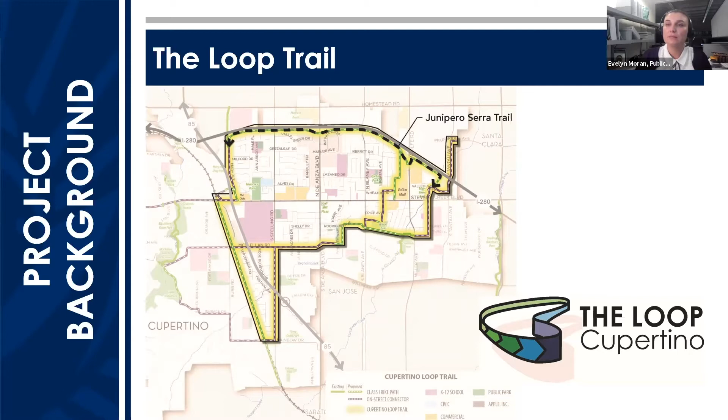In 2017, the city's capital budget authorized the funding of the Junipero Serra Trail feasibility study. The city hired Callander to complete this work. The study included a review of existing conditions along the trail alignment, research and documentation of the trail design criteria, the development and evaluation of various trail alternatives, and public outreach. In February of 2019, the feasibility study was reviewed and endorsed by City Council, and in May 2019, Council adopted the final feasibility study.

During feasibility, the trail was divided into 3 segments. Segment 1 is defined as the segment between the Don Burnett Bridge and De Anza Blvd. Segment 2, now the central segment, is between De Anza Blvd and Wolfe Road. Segment 3, now the east segment, is between Wolfe Road and Vallco Parkway.

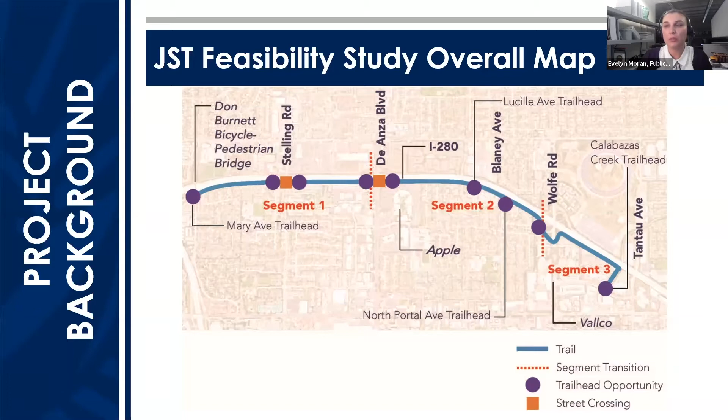Alternative 1 of the feasibility study: the trail alignment cost matrix in the feasibility study allowed decision makers to see various estimates for each alternative. The city selected alternative 1 because it was financially rational, and in December of 2018, the Bicycle Pedestrian Committee endorsed this alternative.

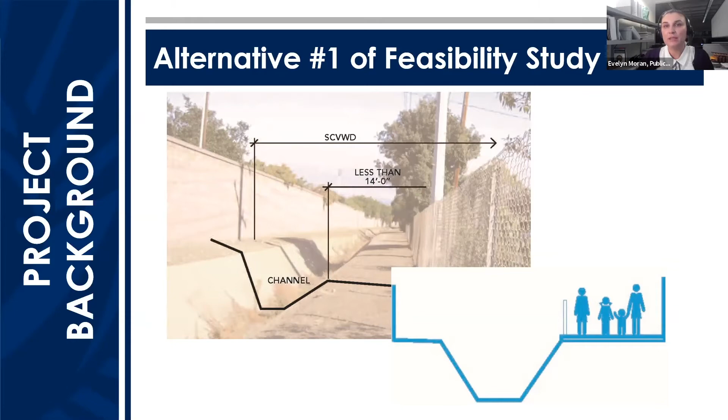The city decided to initiate the project with the east and central segments first because they posed the fewest engineering challenges and it was felt that these segments would generate higher usage from commuters and residents. The east and central segments of the JST Trail are eligible for Measure B funding administered by VTA.

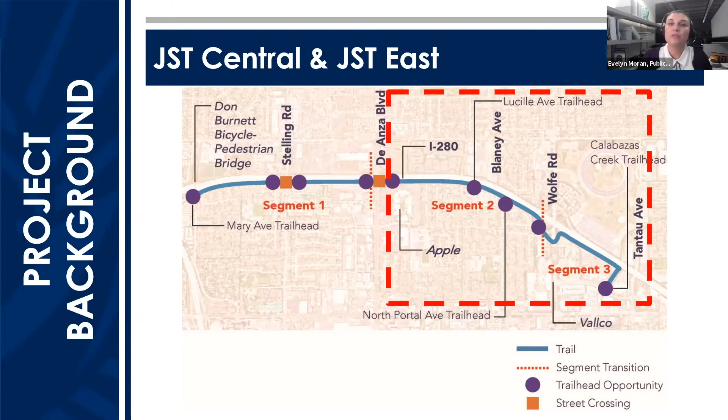Information gathering and concept phase: getting to this point in the project started in July 2020 when the design team was selected from a pool of qualified candidates via an RFQ. Then the survey and site inventory for the East and Central segments were collected between December 2020 and February 2021. During the months from March to May of this year, the concept design for the East and Central segments was developed.

We have 3 community meetings to provide input. Tonight, we will focus on residents in proximity to the East segment. At the May 20th meeting, we will focus on residents in proximity to the Central segment. On May 27th, we will focus on citywide input.

From the summer of 2021 to 2022, the design team will analyze the community input gathered and refine the design. In fall of 2021, we will have a community meeting. The council must authorize the construction award so the earliest date construction can start for the East segment is fall 2022. In early 2023, the East Trail opens and the Central segment development begins.

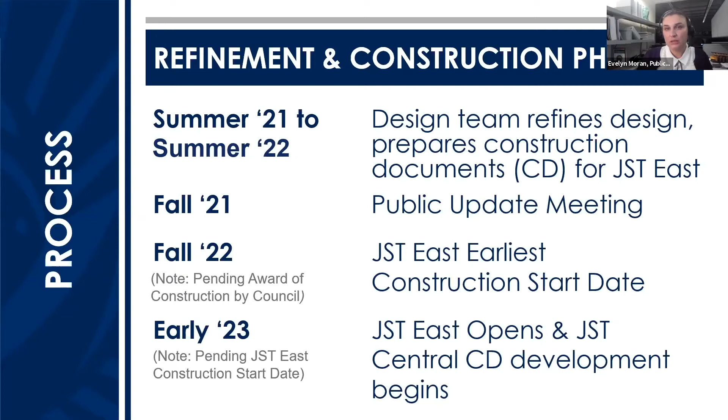Now the design team will walk through the existing conditions and concept plans.

Good evening, my name is Dave Rubin. I'm with Callander Associates, and I wanted to walk you through the existing conditions before we get into the trail concepts themselves.

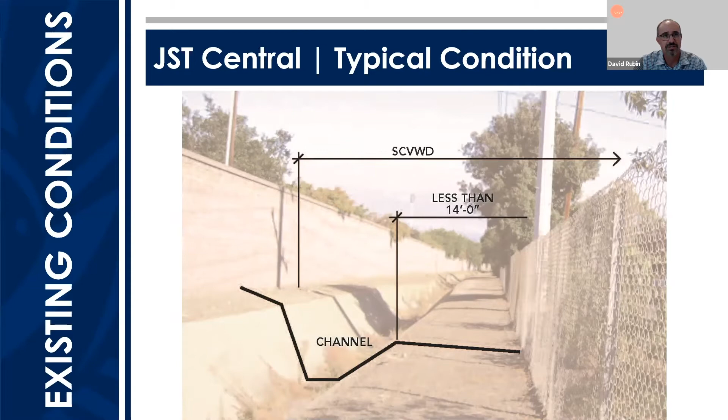I wanted to orient you to some of the typical conditions you see in the Central segment. This first image shows a typical condition within the Central segment. The channel is lined with concrete throughout this segment, and the distance between the top of the channel edge and the fence varies throughout.

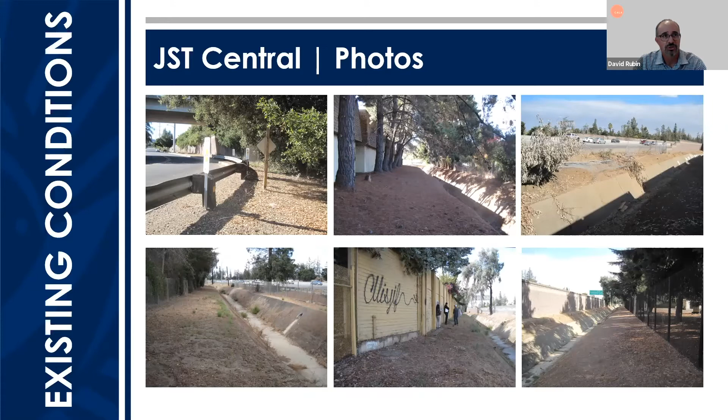Here are some images of the various conditions encountered within the Central segment. For example, the upper left image shows the bend in North Blaney Avenue where it would meet the proposed trail. The other images show the existing maintenance road next to the concrete lined channel.

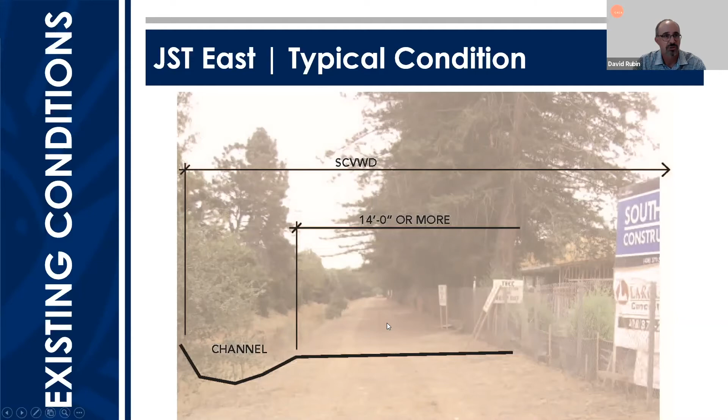Within the East segment, the conditions are similar but a little different. They're generally a little wider, so the maintenance road in many places is 14 feet or even more, which we didn't have in the Central segment. Here are a couple of photos to show what that looks like. This segment does not have a concrete lined channel, as you can see. In the lower left corner, you can see where the channel meets the Calabazas Creek.

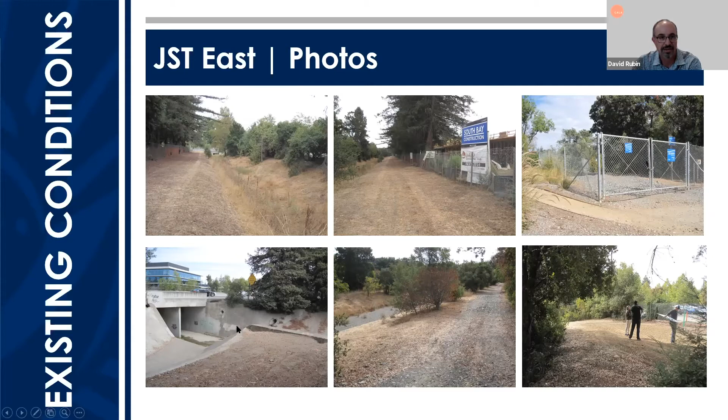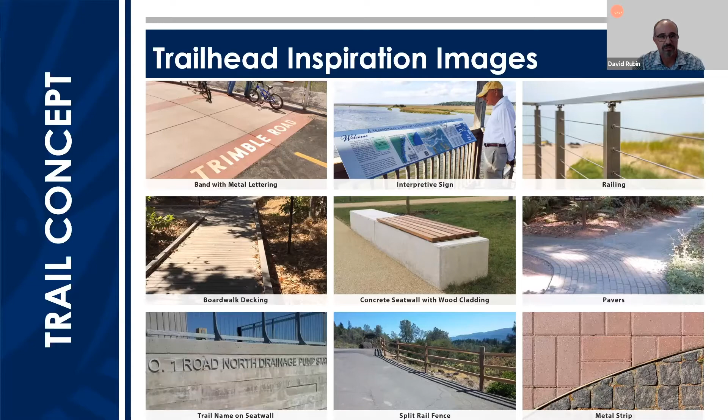Before jumping into that, I wanted to give you a sense of how this trail might look. The trail would, in addition to having a two-way Class 1 type trail for multi-use, have trailheads where people can rest, gather as a group, and learn about interesting aspects of the area through interpretive signage. Materials used in these spaces would include pavers, decorative concrete bands, railing, guardrail, concrete seat walls, and even at-grade decking at one of the trailheads.

Starting with the Central segment, the limits start at De Anza Boulevard on the west and go east all the way to Wolfe Road. As Evelyn mentioned, we're focusing on the Central and East segments for now, but the idea is that should the west segment be built, the connection would occur here at De Anza Boulevard.

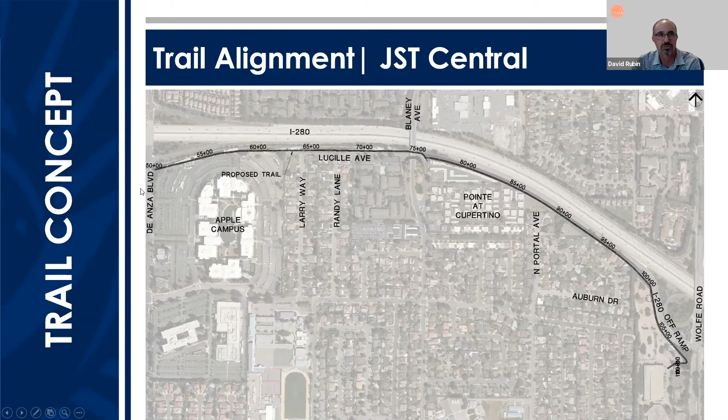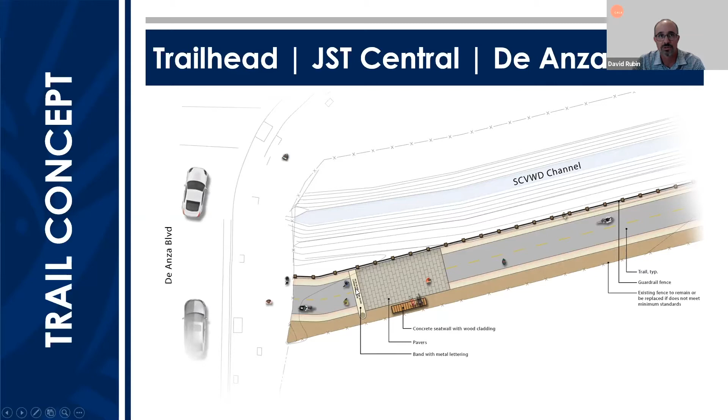Starting with the trailhead at De Anza Boulevard, there would be a small trailhead with a concrete seat wall and pavers. Each trailhead we're showing you this evening would also have a concrete band, indicating where you are in the world, with inset metal lettering showing latitude and longitude as well as elevation at that location.

Here's a typical cross section within this portion of the Central segment, which is pretty consistent through this segment. The paved surface is 8 feet wide, with 2-foot wide shoulders on both sides of the trail where space permits. There would also be a guardrail wherever the trail is adjacent to the open channel.

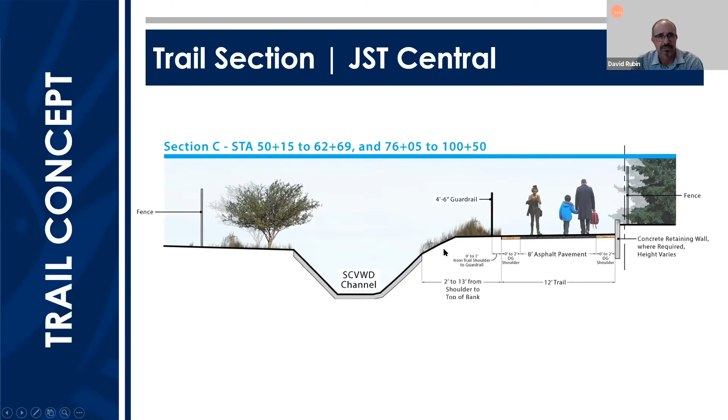This next section is more specific to where the trail passes along Lucille Avenue. It still has a guardrail and is also an 8-foot wide paved trail with 2-foot shoulders. But along the street, we would also have a planting strip that would serve as a buffer from the trail edge to the street.

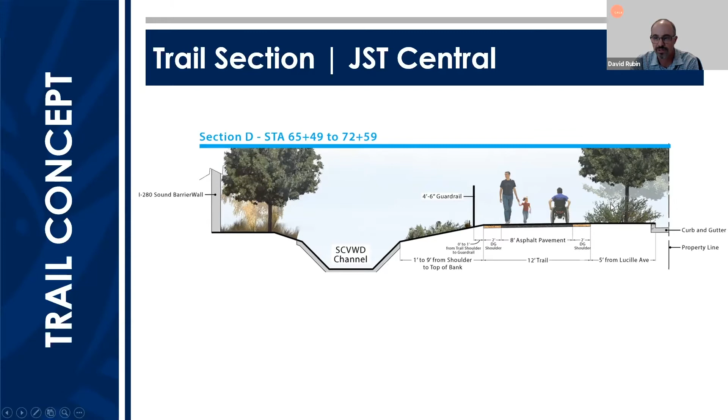At this point, I was going to turn this over to Kwong for a moment to talk about North Blaney Avenue. Thanks, Dave. I'm Kwong at BKF Engineers, civil engineers on this project.

At this location, we're transitioning through this complex area while trying to match up with the trail as it moves further east. At the turn here on Blaney, we looked at various ways to potentially not impact Blaney Avenue itself, but thought the best way to look at it, and what's currently shown here, is to bring the trail out to the street and see if we have the space remaining to make vehicle maneuvers work. That's what we've been studying and working with the city on.

What you see here is the best fit right now: remove the shoulders, keep the 8-foot width of trail, but avoid all the issues in this area - there are power lines, guy wires, and some fencing we're trying to avoid. So we bring the trail out, still provide curb and guardrail, but still fit in that 8-foot wide trail.

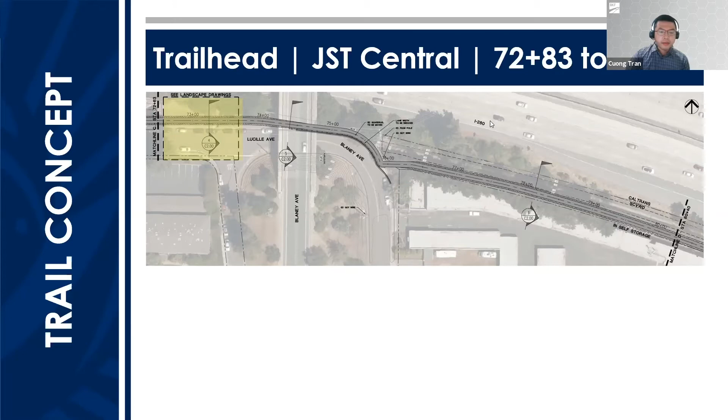All right, so now I was going to walk you through the trailhead that is proposed at this location. So this is at Lucille Avenue and Villa de Anza Avenue, just west of the Blaney Avenue overcrossing. This trailhead provides seating, pavers, landscape improvements, and an interpretive sign, as well as a new crosswalk.

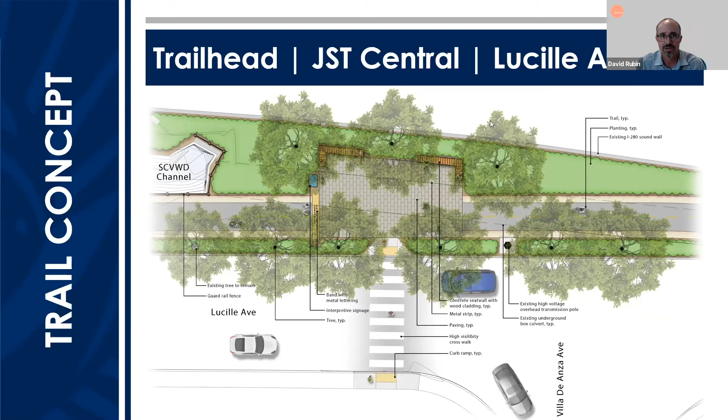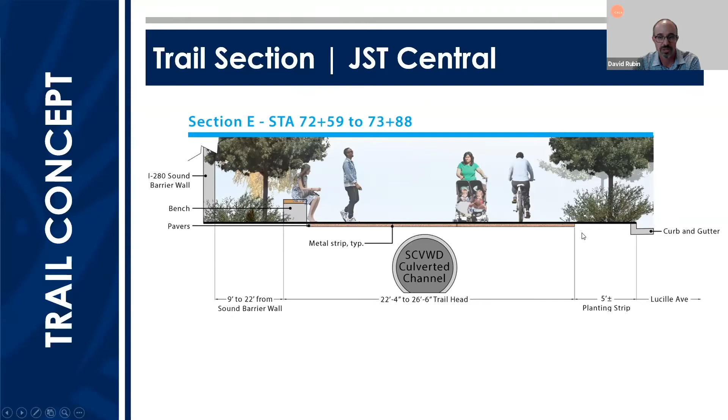This helps promote safer access from the neighborhoods to the south. Here's a cross section through that same trailhead. You'll notice that the trail is actually directly above the water district's culvert that goes below ground at this point.

Now moving a little further east, this is a cross section right along the southbound I-280 off-ramp to Wolfe Road. There's a 15-foot wide easement, and this is where the trail would be occurring along that edge as it follows the off-ramp.

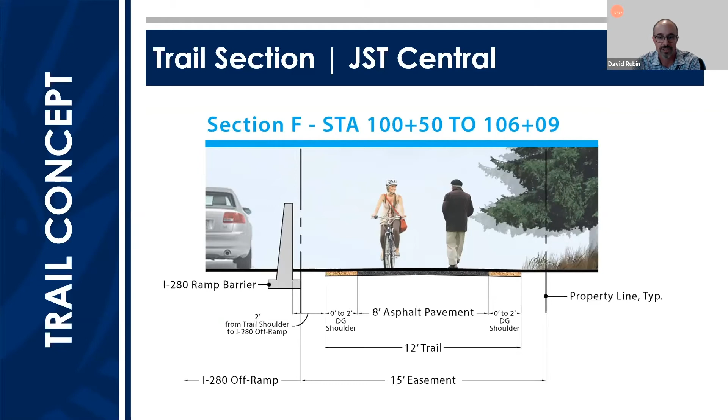And then at this location, the trail actually takes a hard turn and heads towards Perimeter Road, which would allow trail users to ultimately continue east underneath Wolfe Road and also connect to the future development that's occurring at Vallco.

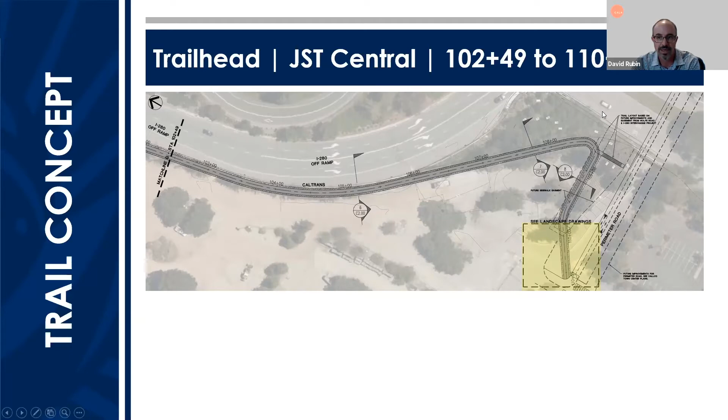It's worth noting that there would also be a spur trail connection to Wolfe Road at the Wolfe Road elevation. So there would be a trailhead at this location, providing seating and landscape improvements, and ultimately this is to provide just a continuation of the trail as it makes this turn and heads underneath Wolfe Road.

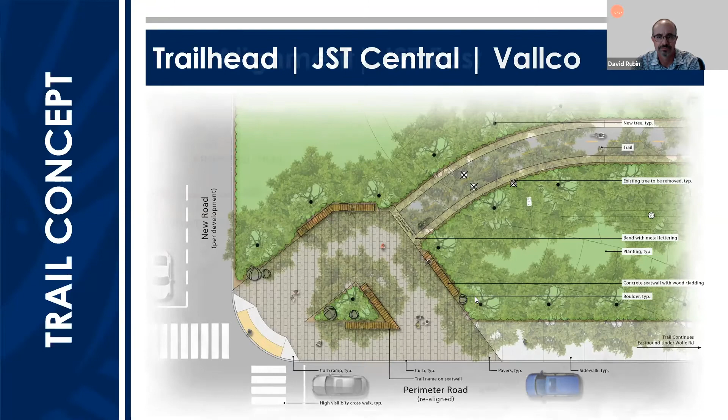Okay, so that's the central segment. Now just talking about the east segment, this goes from Wolfe Road at the west and continues eastward all the way to Calabazas Creek, where the trail would then turn to the south and terminate at Vallco Parkway.

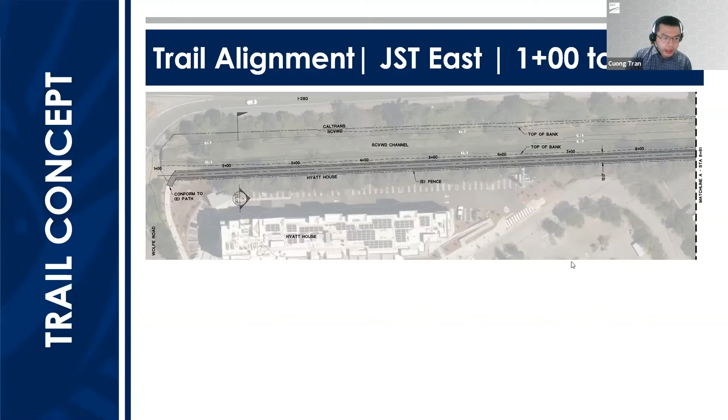So actually, I'm going to turn it back to Cuong just for a discussion about the conform to the Hyatt House. You see in this slide, Hyatt House is at this location of the trail near Wolfe Road. Per the work that was done for the hotel, they installed a pathway with this current trail project in mind. On the left here, there's an 8-foot wide path that we are going to pick up from. You don't see it here, but maybe on the previous slide, the Hyatt trail that was installed does connect to Perimeter and goes underneath Wolfe.

So the connectivity is still there, and we're just picking up on the north end of where Hyatt's trail left off.

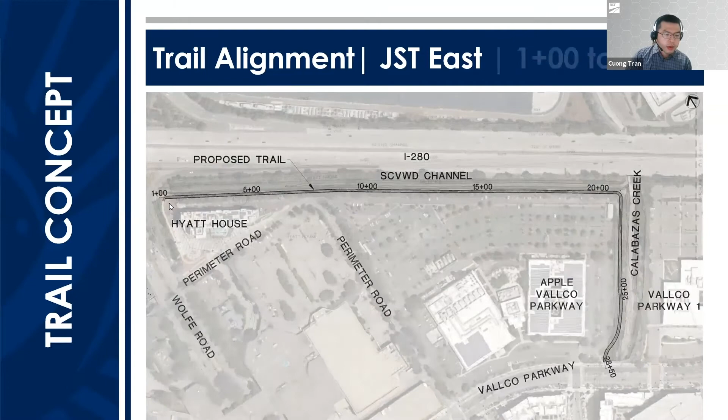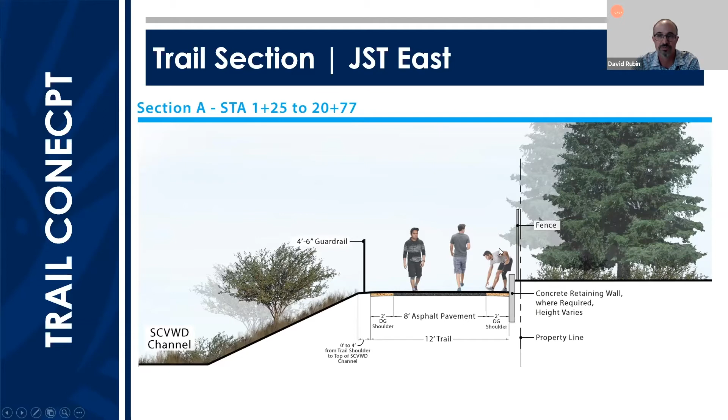And as we head towards the east and we come to that bend that I mentioned earlier, it provides a great trailhead opportunity, something we're calling the promontory. It really is an overlook at where the channel and Calabazas Creek have their confluence.

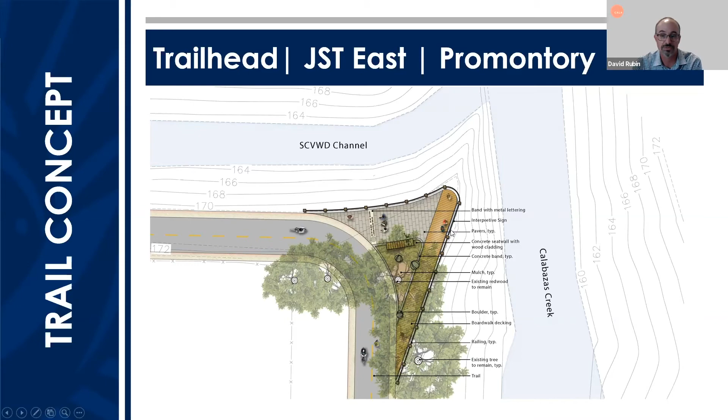So at this trailhead, we're proposing decking along the creek side as an overlook to Calabazas Creek. There's also seating provided beneath these existing trees, some of which are pretty mature redwoods, giving shaded seating, as well as interpretive signage speaking to the flora and fauna of Calabazas Creek. And here's just an image of what that space might look like.

And again, just how it relates to the bend in the trail there. Just a good place for people to pull off the trail and learn a little bit about the area that they live in and that they're passing through.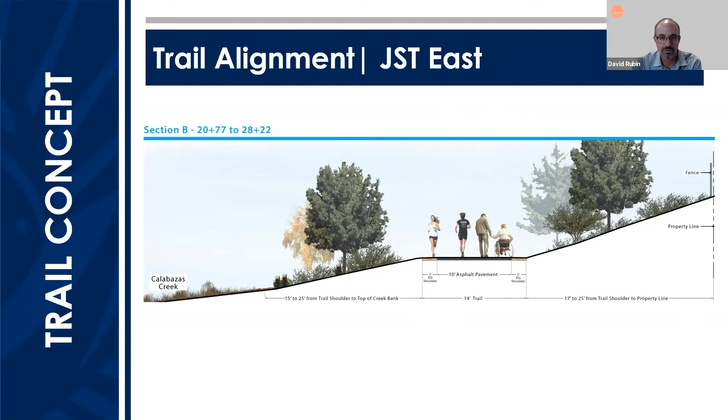And then the need for a guardrail would actually go away at this location, so it would be open and unimpeded views to Calabazas Creek.

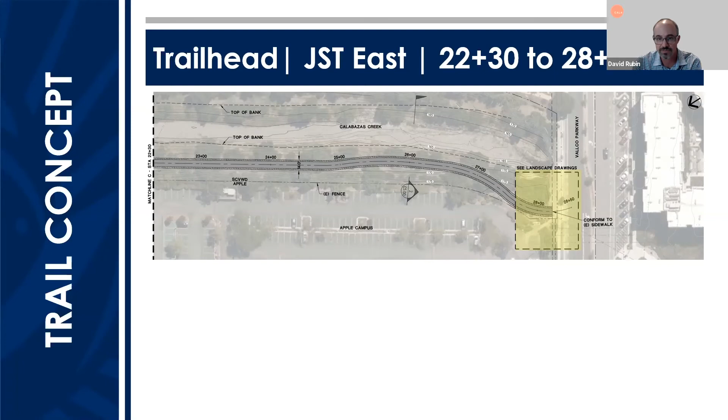And so then the area highlighted in the yellow box, this is where we've got our trail terminus at the east end of the east segment, at Vallco Parkway. At this location, the trailhead is really directing users to the signalized intersection with Main Street.

This is right in front of the Apple campus here. Seating and landscape improvements are also provided, and it also integrates directly with the sidewalk that's along Vallco Parkway.

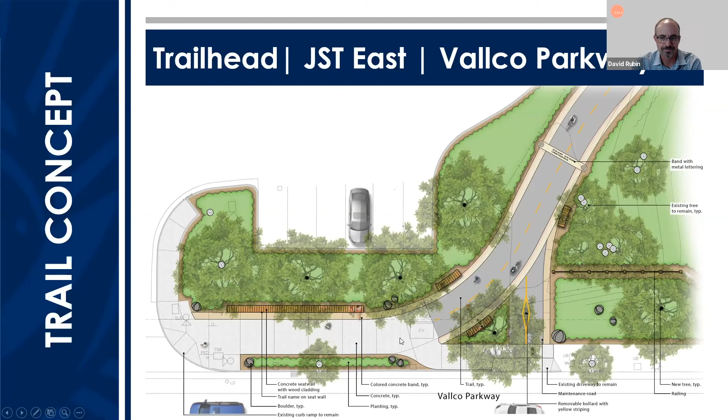And then again, depending on need, the city would also potentially evaluate a trail patrol program.

Milestone markers can also be a good tool for emergency response. A trail user can call 911 and give the dispatcher a milestone marker location, which gives the first responder a more precise location and a quick way to find someone in distress.

And then lighting. Generally, lighting is not a major component of the project. The trail is going to be open from dawn to dusk, as a matter of policy. But to assist trail commuters in the winter months, some low-level lighting may be proposed at trailheads.